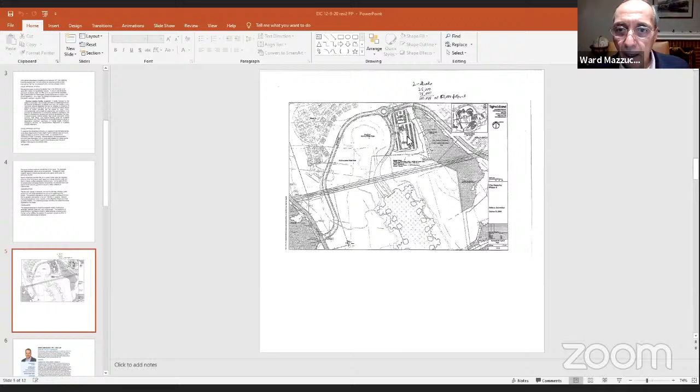The site work will consist of drainage, retention walls, and so forth. And although the building may be built in phases, the infrastructure will be built all at one time to minimize the impact on wetlands. This is a conceptual plan showing what Berkeley Insurance was thinking of some years back on the same parcel. I also want to introduce the design professionals and environmental experts led by Erik Lindquist of Tighe and Bond. I'm introducing their resumes so that you can see that they are all experts in their field. Any questions on what I've mentioned so far?

Anybody? Mr. Chair - yes, Ward, I presume that the original permit issued by the Inland Wetlands Agency has expired? For the office building, you mean? Correct. I don't think they went as far as to obtain a permit. Eric would probably know better than I would, but I think they were just developing a conceptual plan, and I think they got the zoning commission to amend the master plan to allow the building, but I don't think they followed through with all their approvals. But had they gotten the wetlands approval, it probably would have expired. Yes. Okay, thank you. Any further questions?

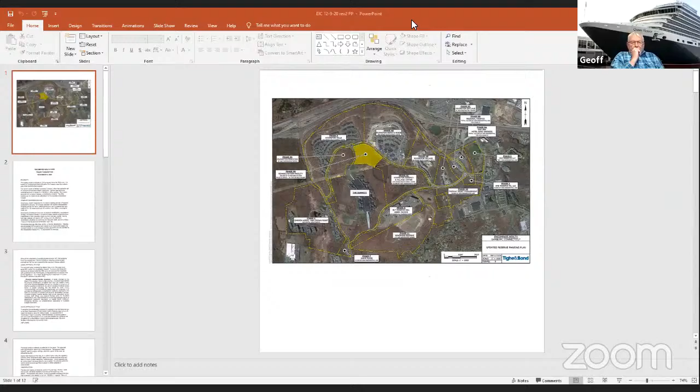Good evening, for the record my name is Erik Lindquist. I am a senior project manager at Tighe and Bond and a licensed engineer in the state of Connecticut. With me tonight I have Matt Popp, the landscape architect, who will be available for questions if there are any. I also have Rick Canavan with Tighe and Bond, who is a principal environmental scientist and was responsible for the wetland flagging and can answer questions on functions and values, project impacts, and things of that nature.

I'm going to go ahead and share my screen now so that I can give you a brief overview of the project and what we're trying to do here, and how we're going to be avoiding the wetlands and have non-impacts on them.

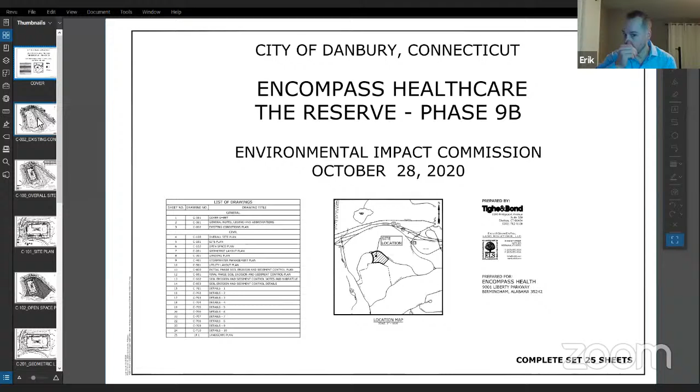Moving forward, this is the project survey. As you can see, the wetlands are here with this dot hatch, flagged right around here and going along the side. This is the primary wetland source for the site. If you're familiar, there's a large culvert under the road here, so everything from the area between us and phase 4C gathers through this area and comes down through this water course and then goes under the culvert. This is the regulated area right here, which we are impacting, which is why we're in front of you tonight.

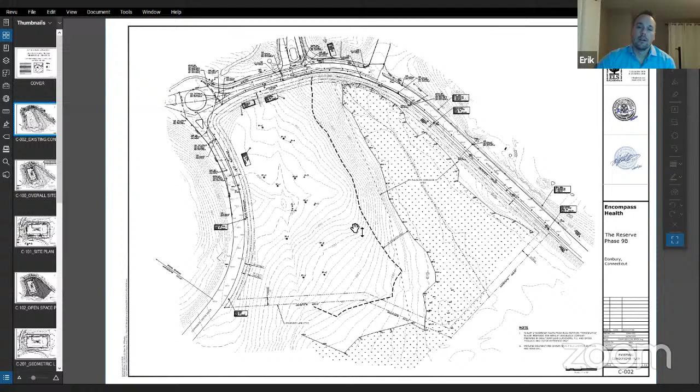And this line circles the site here, which leaves us our development pad up in this area. Here's the overall site plan, giving you a bird's eye view of what we're proposing, our proximity to the wetlands, and you can see here the regulated area line that goes through the eastern portion of our site.

This is a little bit closer up view, giving you more detail on what we're trying to do here. Our access will be off Reserve Road, which will allow us to circle the site. We'll have a drop off here. I don't want to go into too much detail — if you guys want me to, I can, but I just want to give a broad overview of what's going on here with accessible access and the various elements around here.

The biggest thing to note for you guys is the wall back here. When I get to the grading plan you'll see it a little better, but this wall is the limit of our disturbance. There will obviously be, during construction, some disturbance further past it for trucks and things to construct the wall and do some clearing. But once this is established and the wall is in place, this will form a very nice vegetative and animal buffer between us and the wetlands. If you have questions on that, Rick Canavan is on the phone and he can address that as well.

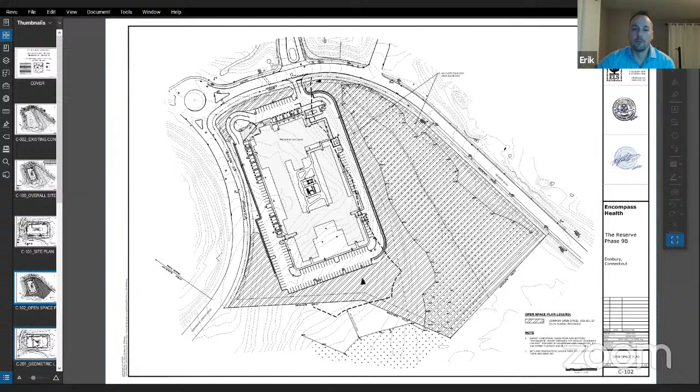This right here is more for the site plan, so I don't have to go through this. This is just the open space plan, so I can skip past that. Layout plan, further detailed, just dimensions and things of that nature.

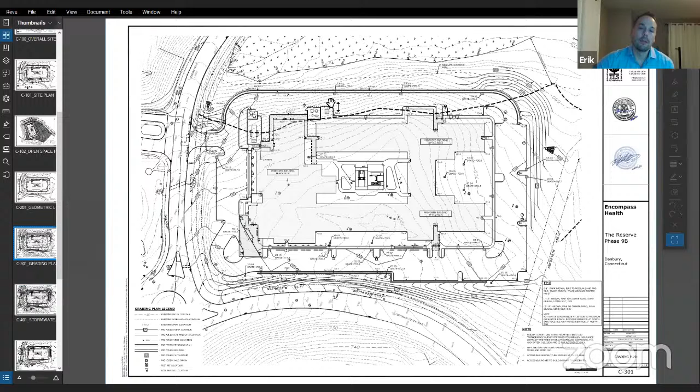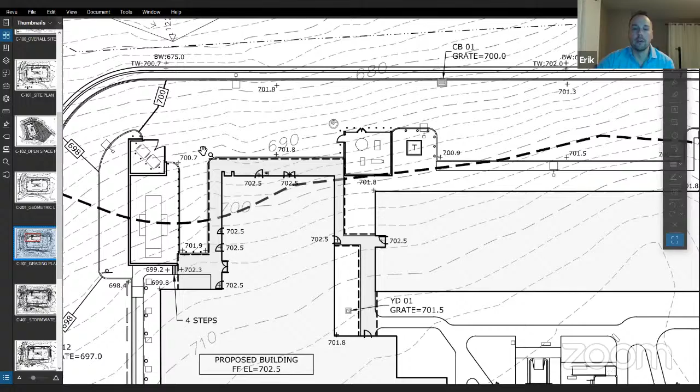The next page, let me zoom out a little bit.

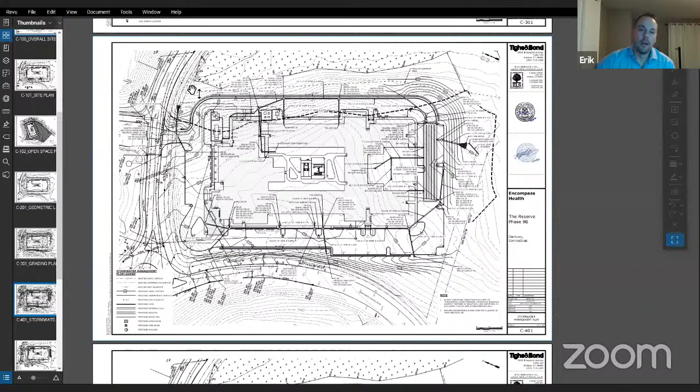This system has been sized for 1-inch water quality volume per state DEEP requirements. And we've ensured, as a control point at the culvert underneath the roadway here, that there is no increase in peak flows for any of the storm events. So that's all been addressed by the storm drainage system for the project.

As we move forward, this is the utility plan. Don't really need to go into much information on this either, but we're fed off of Reserve Road for all our utilities. When we get into CDs and refine these plans a little further, we'll start having further discussions with utility companies about servicing the site and providing loads and all of that.

Lastly, and probably more important for you guys, is the erosion control plans. As you can see, I did a two-phase plan. This is kind of to clear the site and allow for land disturbance to facilitate construction of the building and the walls. So we're going to go out there and clear and make our initial cuts along here to provide an area for the building pad.

And we're going to start to fill out on these sides for where the wall will eventually go. As this develops further, we may tweak it a little, but I wanted to show that we will have protective barriers along the entire wetlands, the silt fence, hay bale row, both. We'll have controls for this—I forget the term for it—but the water quality sumps that we'll have out in the site.

Sediment basins, there you go. So we'll have two of those out here. Those will have controls and protections in them. We'll have a sump with a crushed stone perimeter around it and a filter fabric over a riser pipe that'll allow us to drain the area.

So we've set it up into two zones here that'll allow us to really drain the area and control sediment deposition from the site. And we'll construct the discharges for each of these two sides right off the bat so that those can be maintained throughout the entire course of construction.

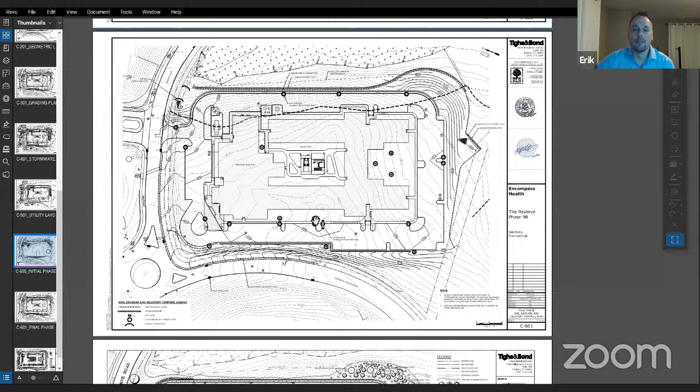As we finalize the plan, this is just the last phase of the erosion control, which shows the final build-out with the protections we'll have around the proposed drainage structures and around the wall construction. This may push back a little bit, like I said before, for constructing this wall, making it a little closer to the wetlands to allow a little more room to get in there and do some work. But by and large, that's what we're planning on doing for the proposed phase.

And then lastly, this is the planting plan. Matt Pop is on the phone and can go over this if need be. But this is just showing the types of plantings that we're going to have near and close to the wetlands as well as throughout the site. I think this might just be a redundant sheet here—yeah, that's just the end of it.

So that is the limit of my presentation, but I'll pass it back over to Ward and he can continue to go from here.

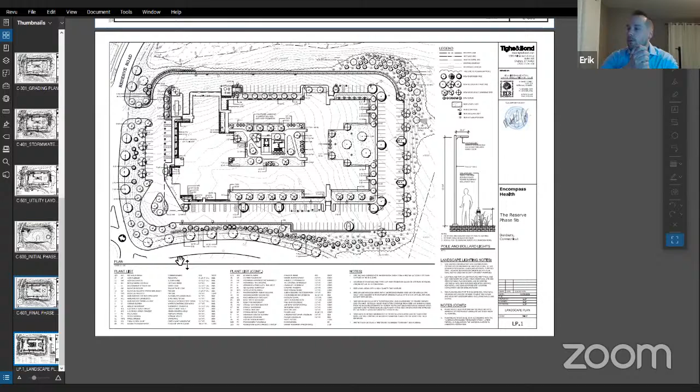Well, thank you, Erik. That, I think, provides the essential overview that we wanted to get before the commission. As Erik said, he and I are available for questions, as well as the landscape architect, Matt Pop, and our soils specialist who conducted the delineation. We think it's a pretty simple, straightforward project, but we're happy to address any concerns or questions that commissioners may have.

Anyone have any questions? Mr. Chairman? Go ahead, Mark.

I would like to hear of the functions and values that were found of that particular wetland, number one. Number two, the drainage to the front near Reserve Road.

I'd like to hear a little bit more about, I think I heard that on a permanent basis, that would be a point discharge in the upland review area. It didn't look to me like there was any particular treatment proposed. So I'd like to hear a little bit more about the impervious area that drains there on a permanent basis.

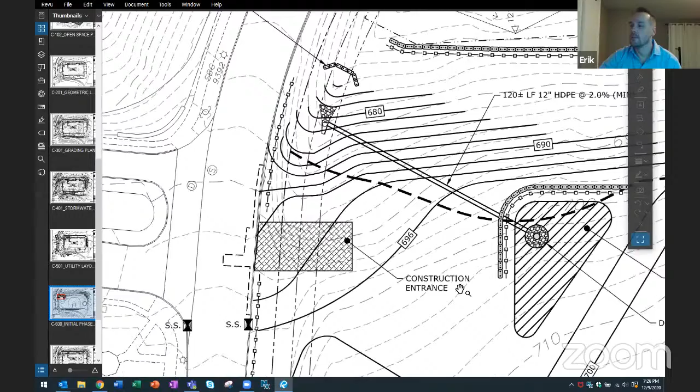As far as the E&S plan, I assume you're talking about this guy over here. This probably doesn't show it as well as it probably should—that's a probably bad drafting issue right there. We'll probably have to put a temporary structure here and tie this into it. But basically, this is designed to take overland flow for this area and go into this basin. The basin is designed as a sump.

And at the far end where that circle donut looking thing is, what that is, it's a perforated riser pipe with crushed stone all around it. That riser pipe is wrapped in filter fabric. So when the water rises up inside the sediment basin, it will go through the stone, through the filter fabric, and into the perforated pipe. So that's designed to keep as much of the sediment in that trap as possible, so that mostly clean water—it's never going to be perfectly clean, but it's designed to get it as clean as possible—will be going into this. If this becomes an issue, we can put the water quality structure in earlier and just clean it out. But typically we don't have to do that, and it's not necessary.

So we did not show that, but we also have protective erosion controls here to make sure that this area, if it ever ponds up too high, is still maintained in there. So those are the precautions we've set in place to mitigate it.

The only reason this is inside the regulated area is because I was trying to maximize the amount of runoff we got into it. If I pulled it back further, I'm getting less area and more of it's getting untreated and going up against the erosion controls out on the site. So my goal was to capture as much inside the sediment basin as possible to minimize the potential for sediment-laden runoff going into the wetlands.

During construction, we also have this hay bale check dam that'll slow flows and mitigate the flow of any sediment that may get past this system. As it goes in here, it's going to back up against the check dam. We could add another one to it. The water goes into the hay bales and ponds up, and the clean water gets filtered through the hay bales and goes through them. We'd do another one to give tertiary cleaning on top of that.

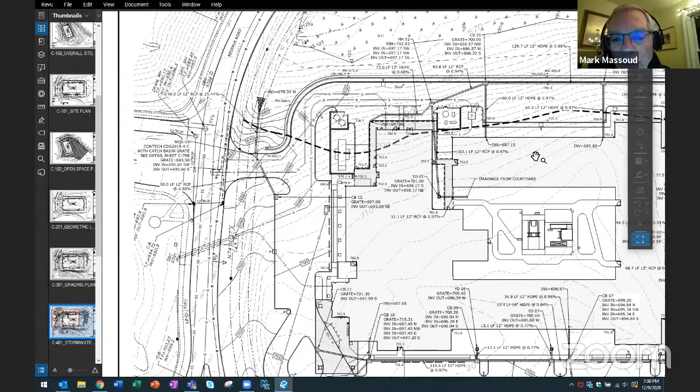And to the second point, it may just be having a backup plan or additional erosion control measures. I've inspected way too many of those types of basins during construction, and while the intentions are good, they're very prone to problems and can be very high maintenance during construction. So maybe for the final plan, we could discuss some alternative or optional erosion control measures to handle sediment runoff when it does occur.

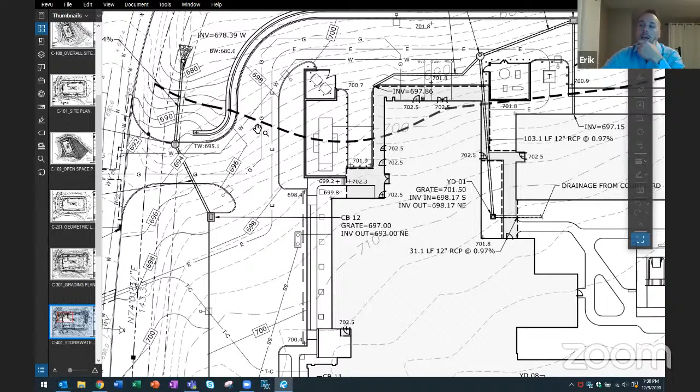I could have Matt speak to potentially adding some tall grasses. I'm going way past my pay grade talking about vegetation we could do over here, but I could throw it over to Matt to talk about ways of enhancing the discharge location to provide other levels of quality for vegetative removal and things of that nature.

It is a steep slope, so I'm not going to lie to you and say it's going to be a great source of renovation, but it's additional and something we could do, because this is a fairly decent slope over here. Usually vegetative systems you want flatter areas, so there's time for things to mitigate out and go into the plant roots and things of that nature.

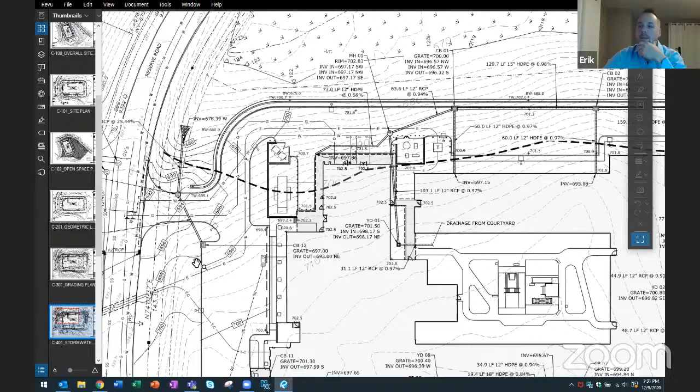Other than that, this is largely taking parked areas, pavement areas and curb areas, so I'm not sure we have a way to get much use in the flatter areas up here. But we can try and look at it, though I'm skeptical of getting too much in that regard. We can definitely look at the discharge and doing some stuff over here. We have area outside the wetlands that we can definitely enhance to provide some of that quality as well.

In terms of the erosion control plan, it's looking like, given the level of perc rates we got out there, I'm optimistic that these things will drain out fairly quickly. I find these things become a nightmare when they're put in soils that don't drain well, because then it doesn't do anything. But if we can get some decent infiltration out there and keep them maintained, making sure the contractors are removing sediment on a regular basis as it accumulates, I'm not too worried about these things becoming a nightmare.

The area is a decent sized area, but this is going to be an evolving plan. Eventually this is going to fill up pretty quickly because once the clearing's done, they're going to want to get this wall started. Then this thing's going to be reconstructed all the time because we're going to constantly keep raising the grade up. So this basin can't stay at this bottom area for too long. The building's up at 703 or so, so we're not going to be able to keep this down at 696 forever. It's going to have to keep moving up as we build the wall. Hopefully that constant reconstruction and movement will allow additional means for repairing and replacing it.

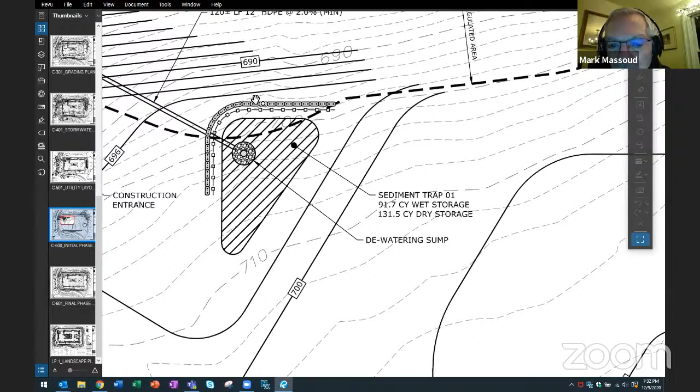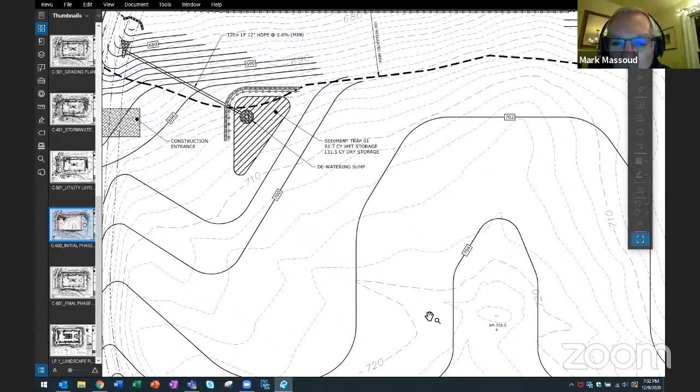So how much open area would there be at the maximum during construction? You mean the area going to this basin? For total site disturbance at any one time during construction activities? I think we're somewhere in the neighborhood of 7 acres. I think that's roughly where we are.

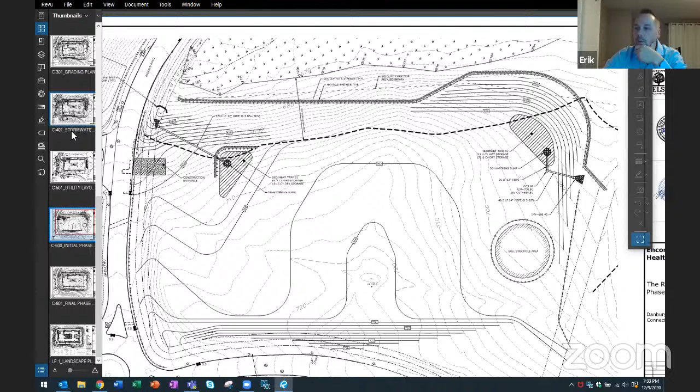So there's probably 2 acres or so, not going to this guy, and probably around 2 going to this guy. I forget, but there are pieces around the edges that aren't getting captured with the sediment traps, so they'd be captured by our perimeter controls. But I think that's the number. I'm not sure if we have a disturbed area on one of these plans. I thought we did, I know it's in the report and I can find it for you.

I thought we were in the neighborhood of 7 acres. Okay, well, I'm happy to keep going, but to me that's a fairly good size open area of disturbance at any one time.

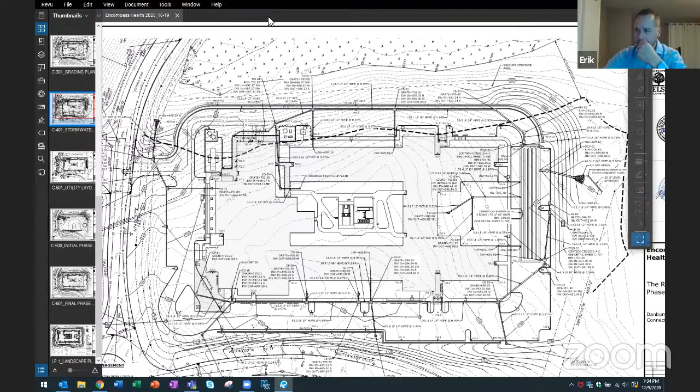You mentioned taking a look at some options, and I'd be happy to have you explore those between now and the next meeting. Okay, and I can pass it over to Matt now, who can go over functions and values. Oh, I'm sorry, Rick, I apologize. Yeah, that's all right. For the record, Rick Canavan, I'm a registered soil scientist, professional wetland scientist.

For the functions and values, if you're familiar with the Army Corps highway methodology, there are 13 different functions and values you review when you do this functional assessment based on the conditions at the site. The principal functions we have for the wetland are groundwater recharge and discharge, flood flow alteration, and wildlife habitat. Then not at the principal level, but present, would be nutrient removal, transformation, and sediment and toxicant retention.

I can go through how much you want to go through, but basically the wetland is important hydrologically in the area. So with both groundwater recharge and discharge, you're seeing groundwater coming out at the surface. You've got a stream through the wetland, so that's both an area where groundwater is coming out from the adjacent uplands, and at other times can be infiltrating as water comes into the wetland, and then the wetland is able to allow water to recharge into the groundwater.

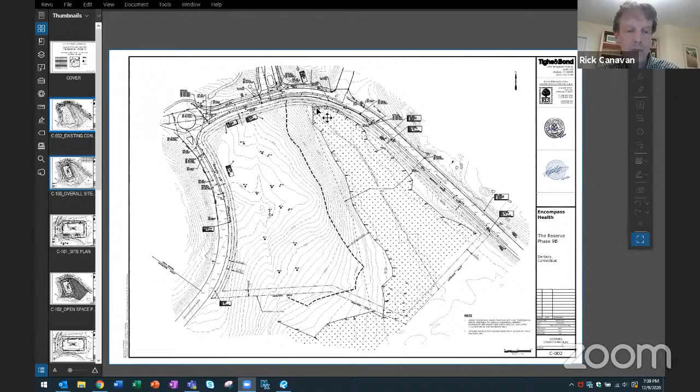Okay, thank you. One last question—did you characterize, or did somebody characterize the nature of the upland soils? Do you know the characteristics of the upland soils in the development area? They're mapped as Charlton Chatfield, and I have it open.

It transitions from Woodbridge and then Charlton Chatfield as the dominant upland soils. We also did geotechnical work out there, with test borings to look at the groundwater level for the development. Those were consistent with the soil survey, and they are included in the appendix of the engineering report if you want to look further in detail at where they are located on the sites.

Sure, great. Thank you. Anything else, Mark? I think I'm good for now. Okay, anyone else?

If not, a motion to table is in order so that staff can look at this further. I'll make a motion to table. I'll second that. Motion made, seconded to table regular activity 1129 to our next regular scheduled meeting, which is January 13th, 2021.